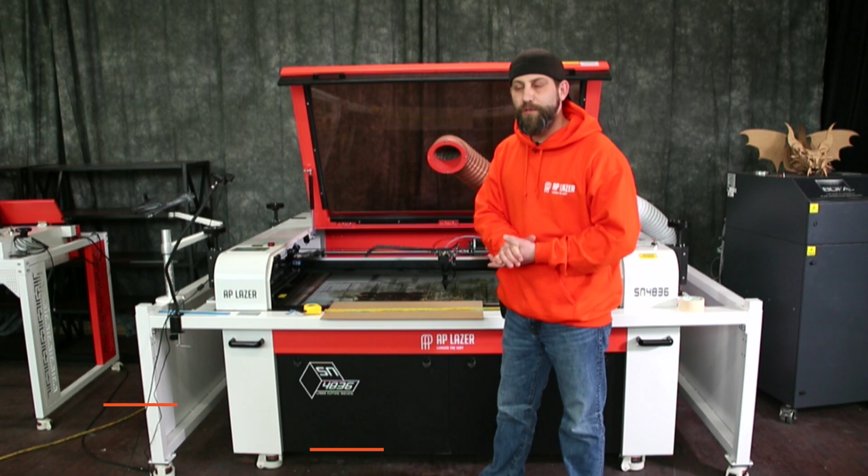What we're going to be doing today is walking through the process of how to take a photographic image and stitch it. One of the reasons we would do something like this is if we've got a smaller machine and a larger piece of material that we're trying to etch, typically something like a granite monument or a long piece of wood, something along those lines.

Now, I don't actually have a really large piece to simulate for you guys, but what I do have is a piece of acrylic that we're going to use. So I'm going to show you how to separate an image into two different sections and just walk you through the process.

Now, with the stitching, it's one of those things that is an easy enough process, but the actual doing it on the machine end of things is a little bit trickier. Even myself, someone who's got a lot of years of experience, can often make mistakes with this. I always highly recommend practicing and testing, and it's really one of those things where you don't want to rush the process. Take your time, make sure you're doing it correctly to avoid unnecessary waste of materials or having to take a stone back out to get polished.

Again, we're going to walk through that process, and there's some things you're going to want to have on hand. One thing I like to do is, because we're doing something so detailed and we don't have a lot of room for error, I actually like to measure out my product in millimeters instead of inches. I find millimeters just a little bit easier to get that pinpoint accuracy with.

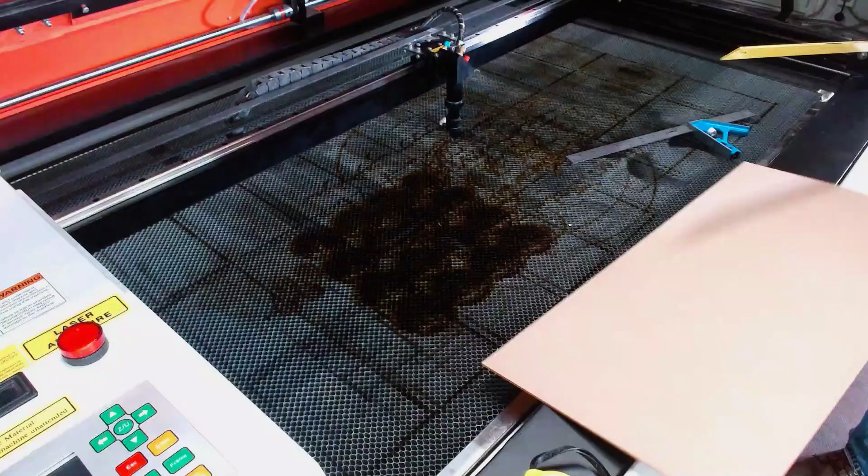So I'm first going to go ahead and measure out here, and we're about 300 millimeters. And then height-wise, we are... looks like 600.5. So again, those measurements are going to be 300 by 600.5. And my tools.

So I'm going to come over here and go ahead and mark out kind of a halfway point. What we're going to do here is you're going to want to mark out and make sure that we're finding the absolute center. This is going to help us pick up where we left off on the initial engraving here.

Now, if you're doing a monument or anything like that, I would recommend using some tape. You don't really want to use a wax pencil on this or anything. You'd want a nice sharp edge here because, again, we're getting very precise.

So if I'm at 300, we're going to come over and mark our 150. And then we're at 600.5, so it's going to be 300.25, which is about right inside here.

All right, I'm now going to go ahead and take my combination square here, get a straight edge, adjust this out, and I'm just going to draw a nice mark there. And I'm going to do the same on this side here.

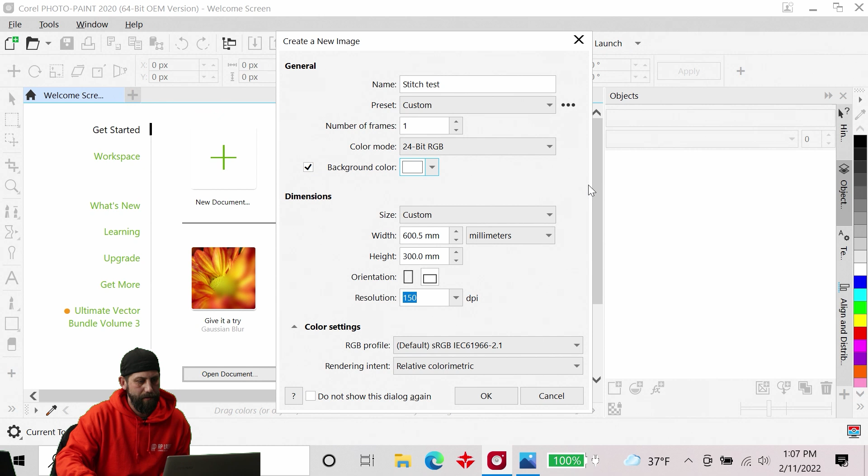I'm going to leave my resolution at 150, and we're going to switch our background color since we're doing acrylic, changing it to a white background. All right, hit OK.

So right here is our working area, our background. Let's go ahead and import in our image. The image we're going to be working with here is this nice old lady drinking some coffee.

So we're going to go up to File and Import, and I'm going to look on my desktop where I have my photo, and just bring it in anywhere and click to drop it in. Now I'm not going to worry about actually cropping or walking through those processes.

As you can see, our image is a lot bigger than our working area here. Always remember that with Corel Photo Paint, we will only be exporting what is inside of our working area, nothing else. So once I have that situated where I would like it, I am going to do a little bit of photo editing on this. I'm not going to spend too much time on it because we're kind of going after the process here.

I do want to sharpen this up a little bit. So I'm going to grab my effects tool here on the left-hand side, the one that kind of looks like a Q-tip. I'm going to come up to my top left, and sharpen is already selected here. We'll do a large sharpen, and just highlight some more of the details here.

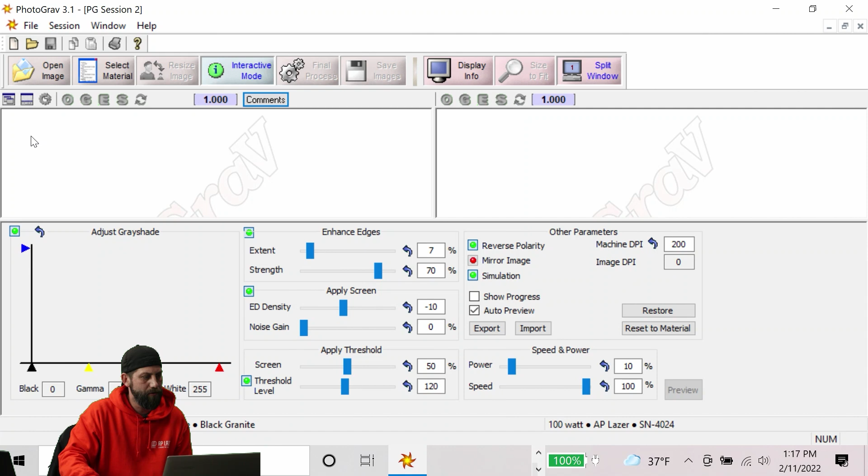All right, let's hit save. Go ahead and go to File, New Session, and repeat. Find number 2 here. Select material, and we're going to change our DPI to 150.

Now if you've noticed, the adjustment on the grayscale on this side came up a little bit different than our other one - mainly because these are two separate images. This side had a lot more darkness to it, which is why the adjust grayshade was showing a bit different adjustments. But if we look at our enhance edges, apply screen, and threshold, those should all be the same. I'm going to go ahead and final process this one here.

And go ahead and save image. Okay, and got number 2.

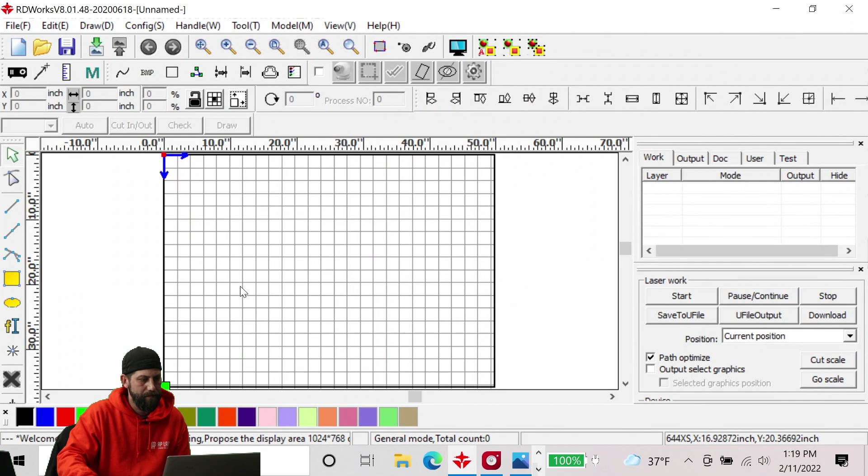So from here, what I want to do is go ahead and open up our RDWorks program. The first thing I want to do is actually bring in both of these images, because I want to double check how everything cropped out to make sure it's going to line up correctly.

So we have our first part here, and I'm going to go ahead and import in our second one here. So again, this is just kind of a visual check. And they look pretty good there.

All right, so I'm going to go ahead and delete this one here. Oop, not quite sure what happened there. There we go.

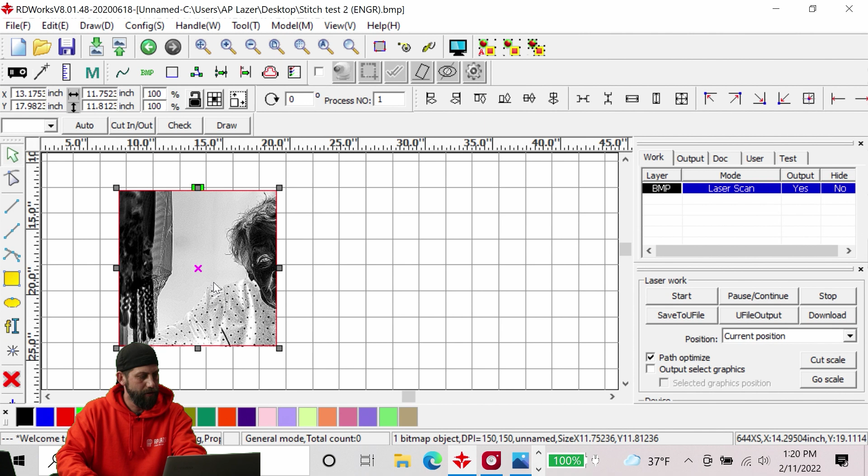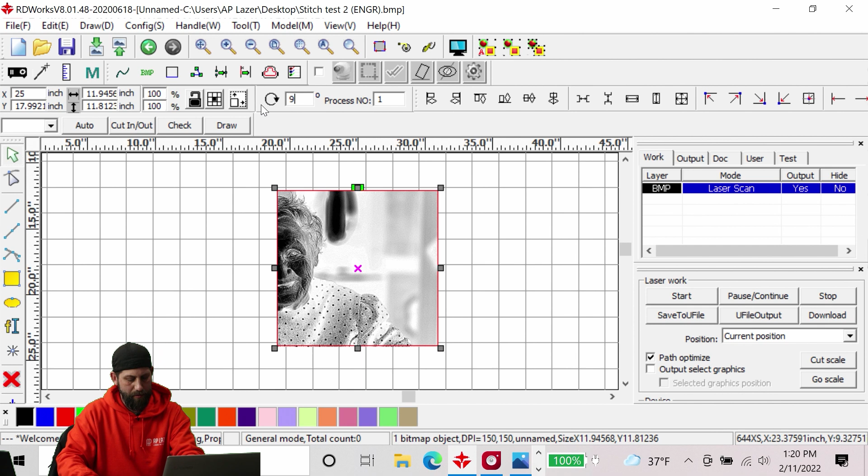All right, so this one here, I'm actually going to rotate, because I'm going to slide this in lengthwise. Oop, I got the wrong one here. All right, so switch that - 90, just like so.

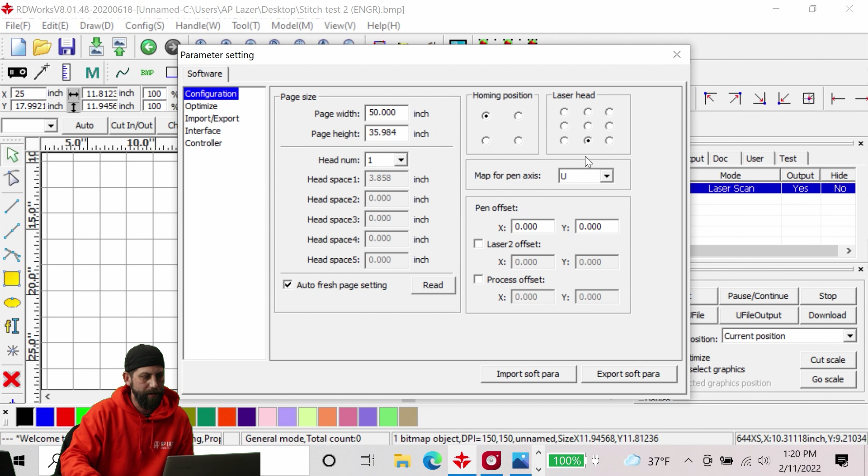The next thing I want to do is go ahead and set my laser origin. Everybody may have a different preference on where you're setting this at - again, like most of these videos, this is just kind of my process. So I'm going to go up to Config, System Settings, and actually what I want to do is start on the bottom center here. Go ahead and hit OK.

I'm going to go ahead and double click on my scan mode here and adjust my speed and power settings. Now I'm going to go ahead and leave the masking on the piece of acrylic, so I'm going to run a little bit higher temperatures than I normally would if this was just straight acrylic or just engraving directly onto the acrylic.

So I'm going to slow my speed down to 25 and bump my power up to 35. Now I know that seems a little bit high, but again, the masking that's on the acrylic is pretty thick. It's got an adhesive underneath that, so I just want to make sure that I'm going through the masking, the adhesive, and then actually getting into the acrylic. Our interval, we're going to use a 0.0067, or if we're running that in DPI, 150. I'm going to go ahead and hit OK.

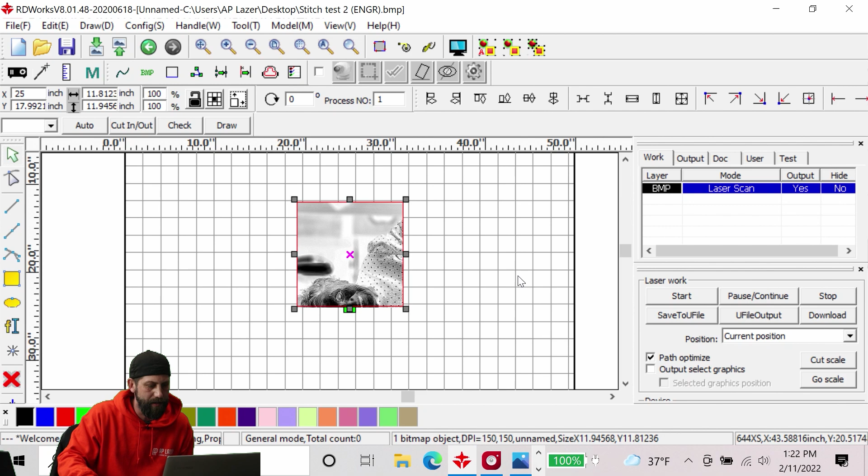And let's go ahead and power on our machine, and let's start taking our measurements, and then we'll get this downloaded.

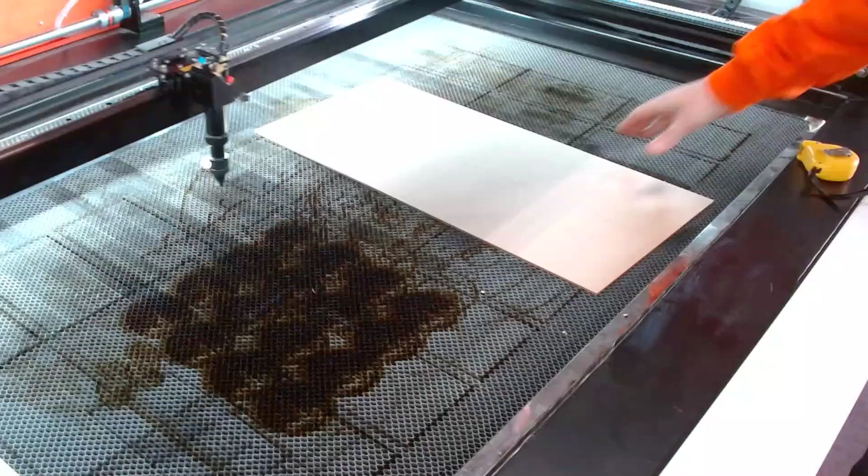Now, the file part here was kind of the easy part. As you can see, it's very straightforward, very simple. This is really where the patience and the technique is going to come into, is actually lining this up. So I'm going to go ahead and bring this piece down. And what I'm going to simulate with this is actually we're going to be starting this on a position. I'm going to push this up and then reposition to try to pick up on the exact same spot here.

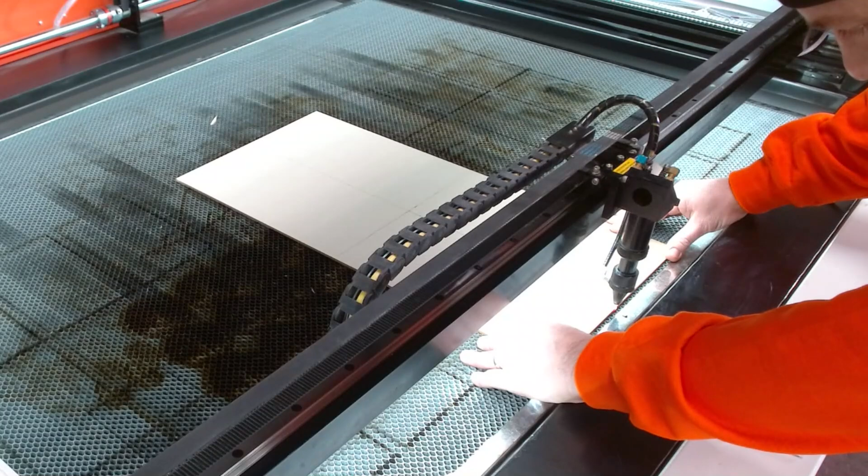So let's go ahead and check our focus. Good there. And look good down there. So I'm going to go ahead and bring this down along my base. This up just this here. And then we're just going to check out to make sure that we're straight.

All right, we're looking good there. So I'm going to kind of come to my center mark. Off slightly there. I'm going to kind of come to the center of where my lines are intersecting here.

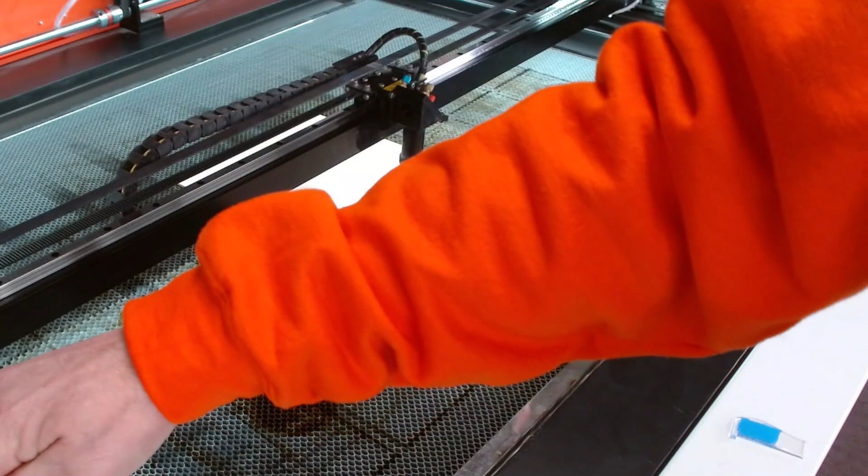Now, if you're kind of having a little bit of a hard time, kind of like I am right now, with getting that nudged over correctly, what you can always do is hit the speed button on your machine and lower your speed down. I'm going to lower mine down to 65 millimeters per second. Go ahead and hit enter. Now, that's not going to have any effect over the actual run of the image. It's just for keying and framing. So you can see now I can nudge that over a little bit easier.

Down just a little bit. I'm going to go ahead and hit my origin to lock that into place. We're going to jump over our computer and we're going to download our image real quick. There we go. Sorry about that, I've got an extra extender on my USB cable here.

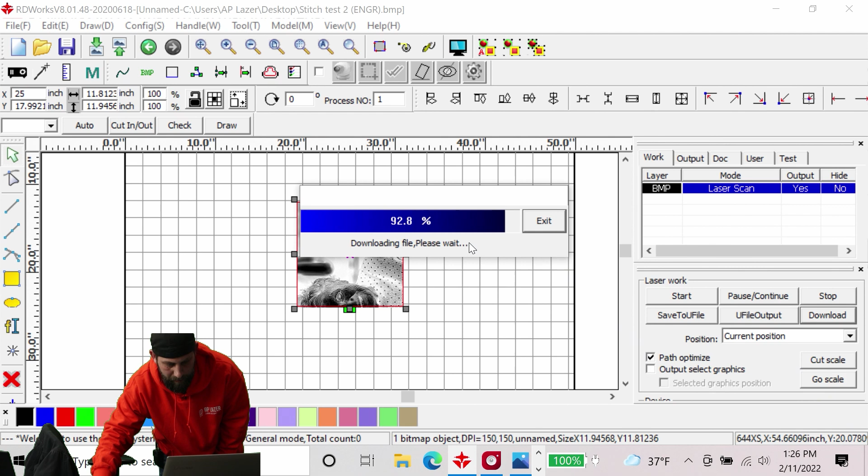Okay, our file's downloaded, so let's go see how we're going to frame out here. So I'm just going to go ahead and hit origin again just to be safe.

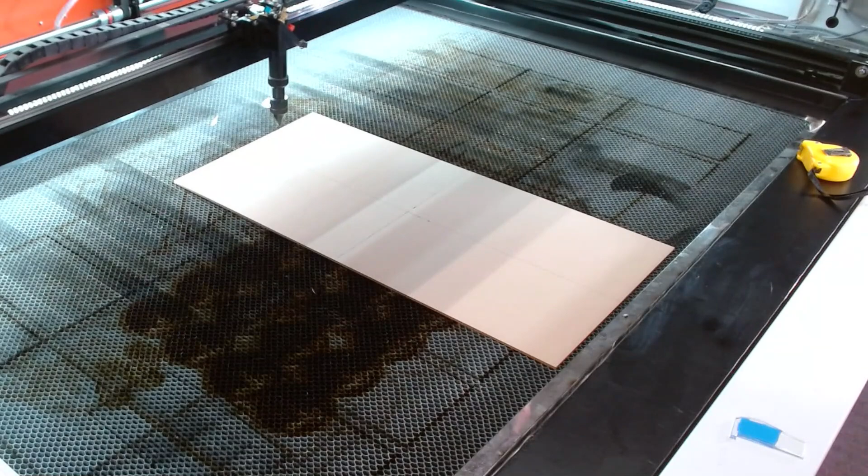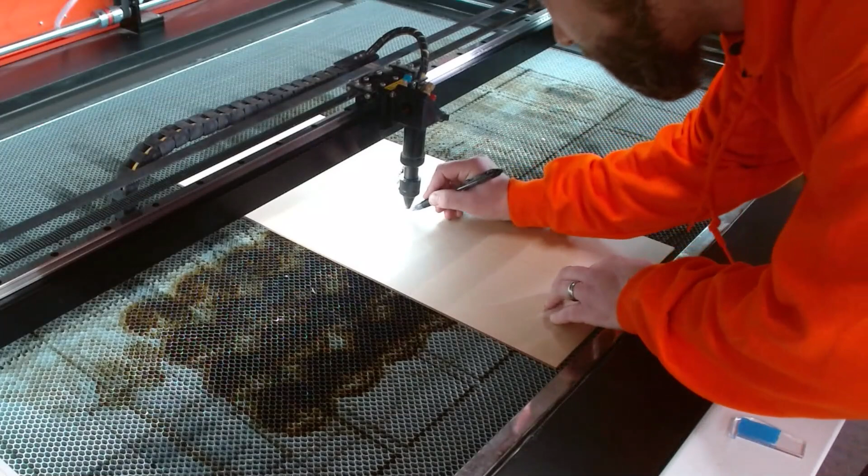All right, now just for safety's sake here, I'm going to find my pen and I'm going to go ahead and make a mark there, again just to make sure that I can find that again. There we go.

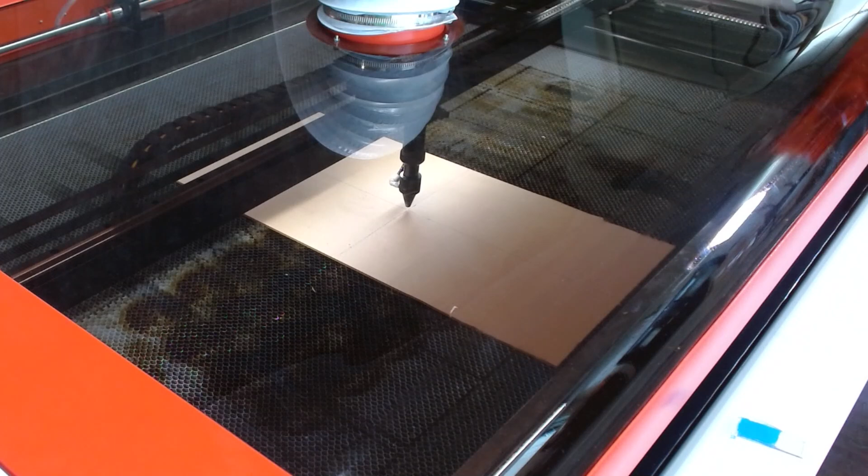All right, we're going to go ahead and close our lid here. Turn my exhaust on. And we'll hit start.

All right, so that side there is going to take probably about 10-15 minutes to run through there. So I see we've got a couple questions always coming in here. So I'll be more than happy to answer these questions while we're letting this side run.

So I have Megan asking, she doesn't do a lot of photos, wanted to know if 150 DPI is standard. Yes, that is the standard DPI that I run all my photos at. And then someone else is saying you can run a little bit higher DPI with Sean Murray. Actually what Sean Murray does, he does a little bit different techniques. He actually runs scripts, which does a little bit different type of effects with that. If you're just doing normal photo processing, I would recommend the 150. I've never gone wrong with that at all.

So somebody, Meg, is asking what a script is. So basically a script is kind of already processed, or it's kind of like Photograve, only you basically can purchase these scripts and it does all of the dithering and everything for you on that particular photo. I know Sean, I do believe, is going to be down at our LaserCon event. If you've got questions about those scripts and things like that, he's a great person to answer those for you.

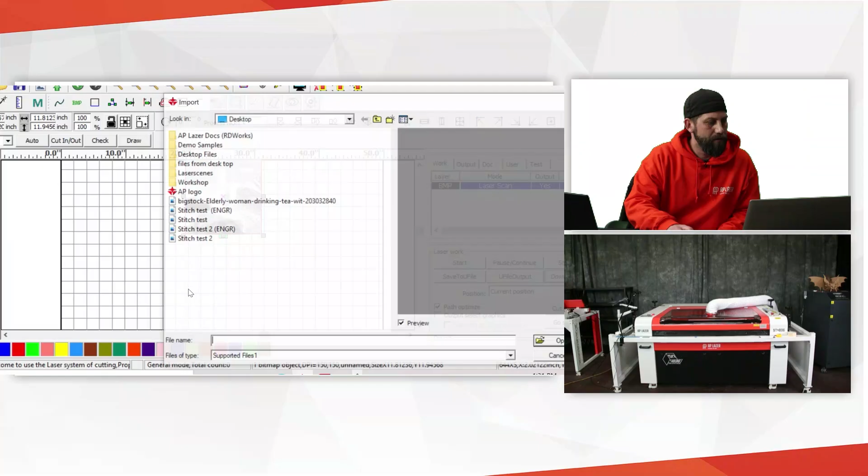While that's running there, I'm going to go ahead and bring in my next image here and get that set up. So, import number 2. I'm going to rotate that one also 90 degrees, and I'm just going to slide this down again to see how we're lining up there. It's pretty good, so go ahead and delete my top one now.

I'm sure this question is going to come up here pretty soon, but there is also a process for stitching vector images. I do plan on making a video next month to cover those vector images, on how to stitch like a cutout if you're cutting out a large piece of wood, or doing an engraving too. So please, if you're interested in stitching, keep an eye out for that video coming next month.

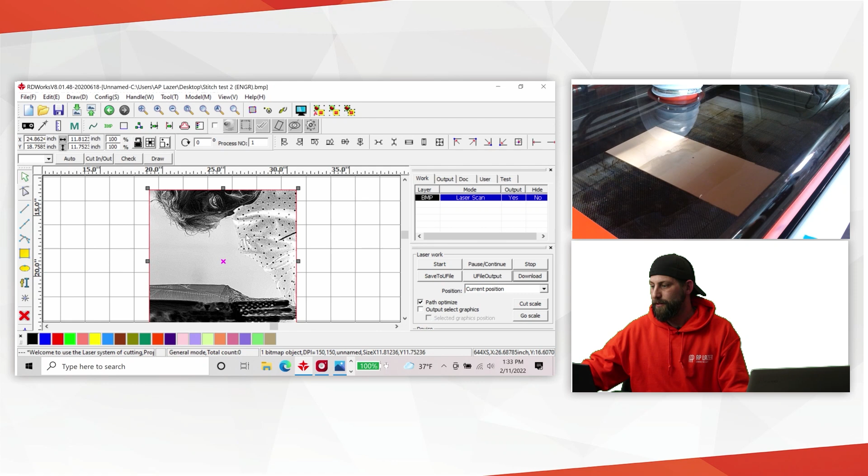Oh, Megan and Ron, yes, I do plan on continuing these. I really do enjoy being here with you guys, and I'm glad you guys all enjoy them as well. It's always nice to talk to people on the phone. Occasionally I do even pop in on a training session, so you may see me once in a while in there. I really enjoy making these, and I'm glad everyone's finding them enjoyable and informative as well.

Ron's asking what speed and power I'm running. I'm actually running at a 25 speed, 35 power. Again, a little bit higher than I would normally go with acrylic, but I want to make sure I'm getting through that tape and everything.

One thing I want to point out as well, with Photograve and just how intuitive it is: notice that Photograve actually mirrored this image for me once I exported that out. I already knew I was putting it on acrylic, so it wants to engrave the image backwards. So when you flip that around, when we peel off the front of that tape, it should be our normal image here.

Sorry everybody, I'm kind of jumping back and forth between two computers here.

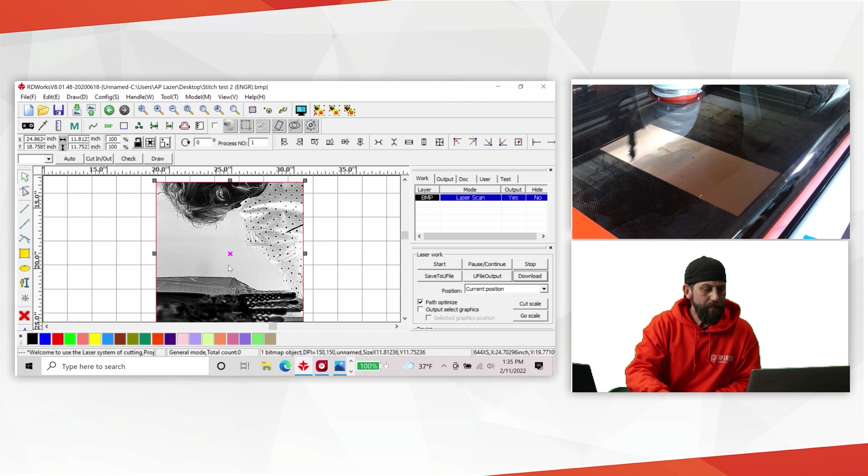Looks like Frank's going to be down there. Frank, we've talked quite a few times. I'm looking really forward to meeting you, buddy.

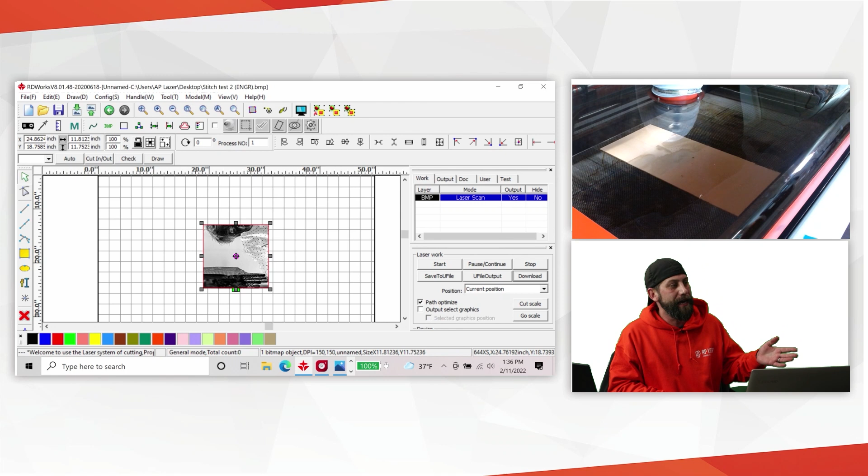Skip's asking about one of my other videos, something about using another cone for better results. I'll be honest, Skip, I make a lot of these videos, so if you could tell me which one it was, I could give you a better explanation. If you watch our other videos, occasionally I do use different types of lenses and different cones. What we're running today is a 100-watt machine with the standard 2-inch lens that comes with all our machines, but it may have been a different lens or a different cone altogether in that other video.

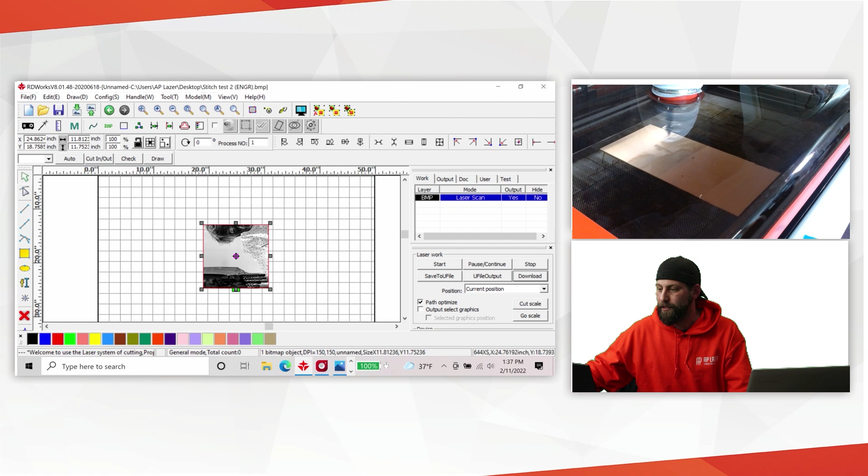All right, we're moving along there pretty well. A little bit longer to go here. And based off the video I'm looking at, it does look like we're getting through that tape pretty well.

Was the cone from the 1812? I think Skip may have been referring to my wood engraving video. I could be wrong, but typically with wood engraving I do like to use that 1812 cone. It exposes the lens a little bit more, but a lot of times with things like wood, and especially glass, that may have been the other one I used that shortened up cone on. It has a tendency because the dust buildup on that is a little bit heavier, so the air assist has a hard time pushing it away. I actually find using that shortened up cone gives me enough distance and still allows me to hook up my air assist, so I don't have to worry about that buildup on the bottom of the cone. What can happen, especially with glass and certain woods, is that buildup will actually end up blocking the beam. So you go to look at your project and there's an empty line where the laser made a pass, but the buildup blocked the beam until it fell off.

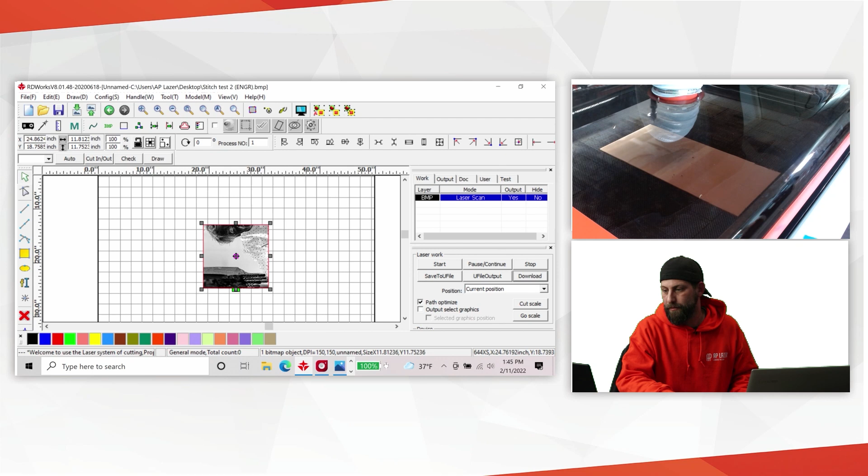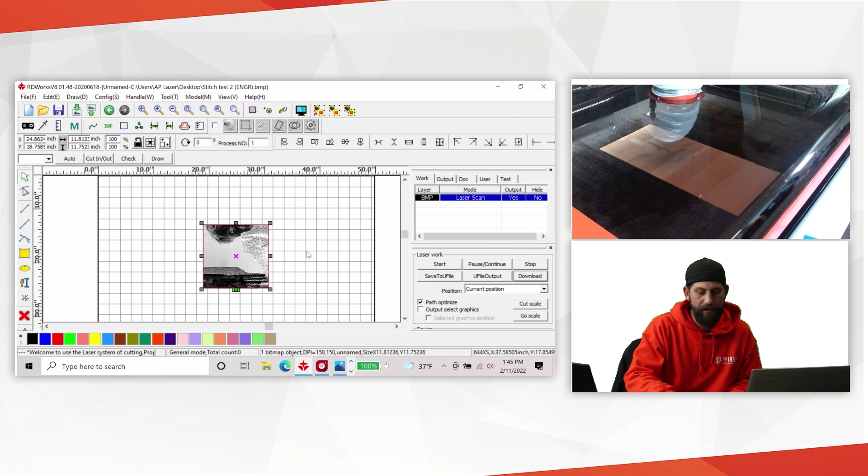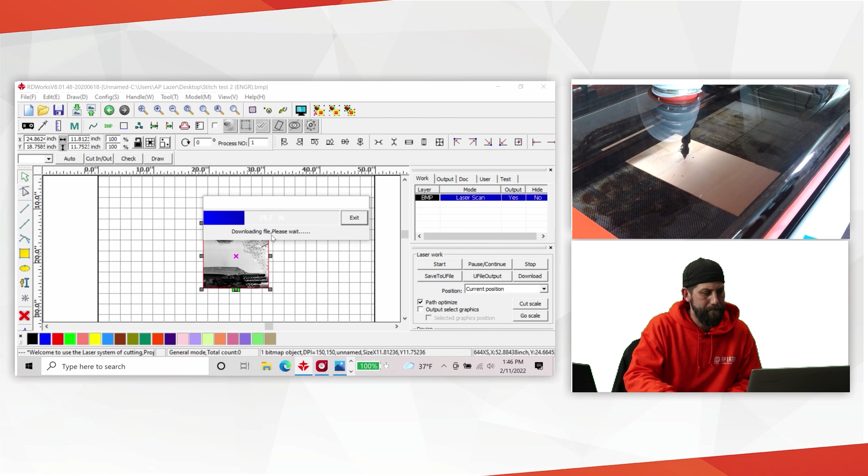Just a few more minutes here, and then we're going to go ahead and download this image and slide our material up. All right, looks like we are done here, so I'm going to go ahead and download my new image. All right, image downloaded successfully. Okay, let's jump over here now.

So what I want to do now is slide this up here. I'm going to pretend this is a large monument, so I'm sliding it back up here. I'm going to make sure I'm still nice and straight.

Now what I want to do is get as close back to my line as possible. I can still see my mark there a little bit. Come out a little bit. All right, it does appear that I'm back on my mark, so I'm going to double check my settings here.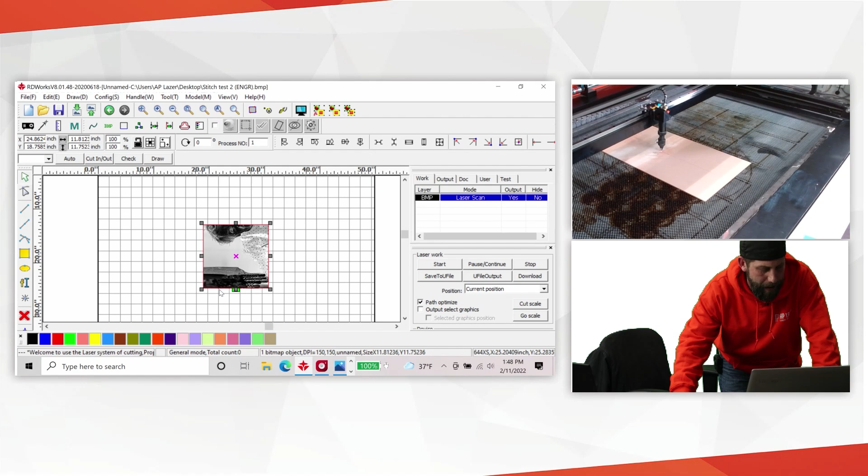Actually, what I'm going to do is move my origin now. Instead of the bottom, I want to come up to the top center. So we're going to move our laser head there, and I'll go ahead and re-download.

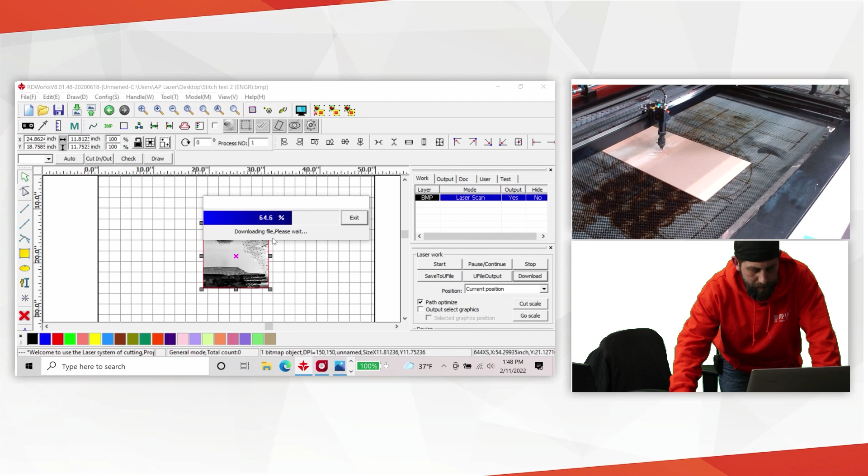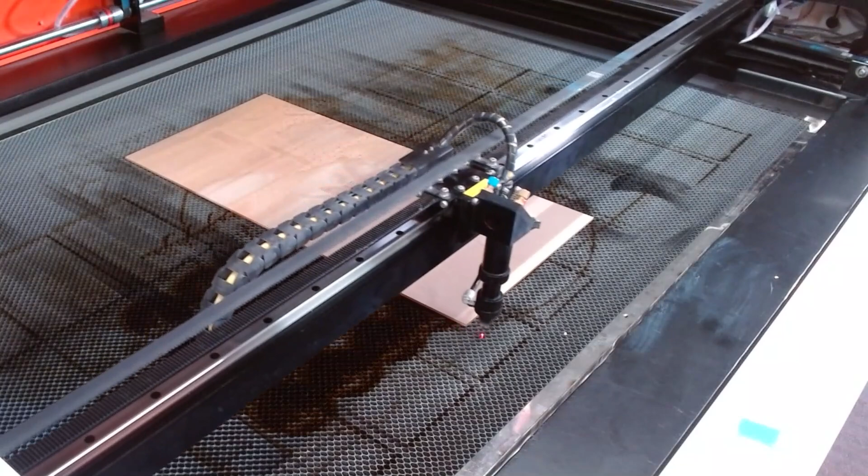All right, we're going to go ahead and frame out. Now, if you notice, I didn't do that right because I forgot to hit my origin button, so I'm going to have to realign here.

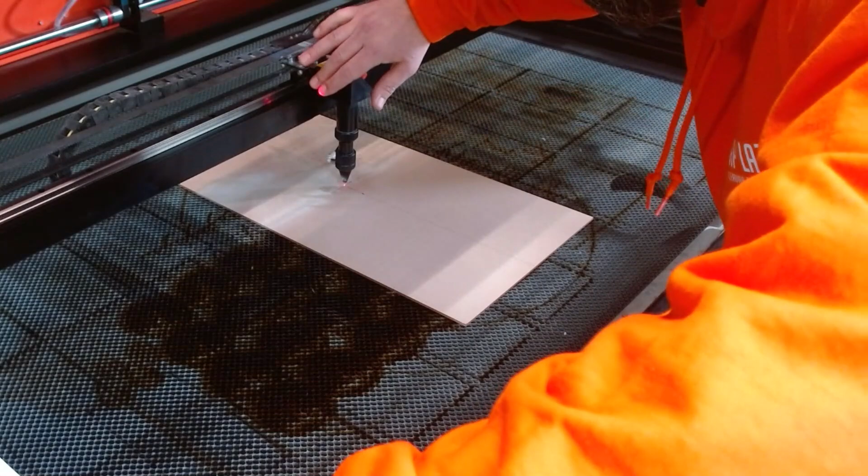Slow my speed down just a little bit more here. There we go. Make sure I'm staying on my mark. Now I'm going to go ahead and hit origin. Again, this is not a process you want to rush too quickly. Always measure twice, cut once, kind of a scenario.

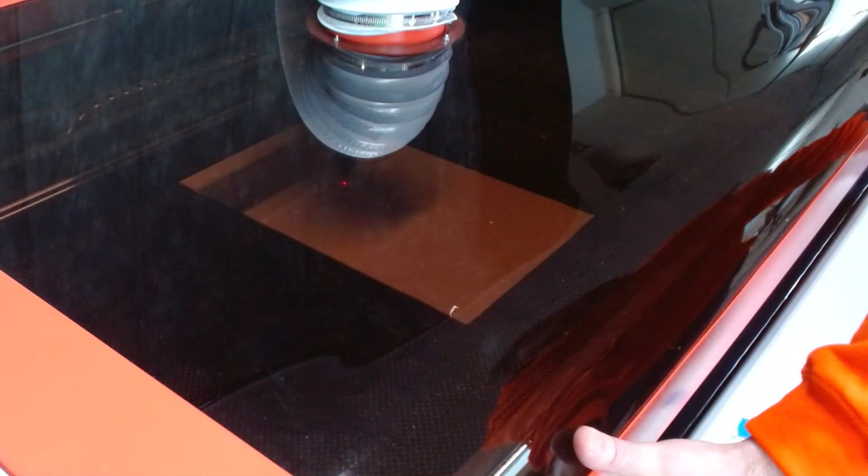All right, we look like we're staying right on our line here. We're going to go ahead and close the lid and hit start. Now, if I've done this correctly, once this is done we really shouldn't see any kind of difference inside there. I'll turn my light back on so we can see a little bit better. There we go.

If you guys have more questions over this, it's going to probably take another 10-15 minutes to run here. I'll be more than happy to answer anything that you may have.

Hope everyone's having a great Friday, getting ready for the weekend.

That's kind of in operation. I'm going to take a little peek here just to see how things are coming. All right, looking good so far. We'll have to wait for our final product here.